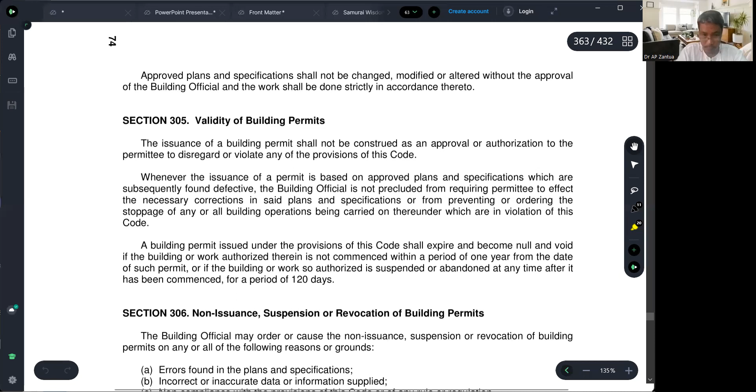So next, we already discussed it yesterday, but we have an appeal within 15 days from the date of receipt of advice of non-issuance, suspension or revocation of permit. So like that example, revocation of permit, you can still appeal. You are given 15 days to do your appeal. And then who will decide on your appeal? You will appeal to the Secretary of DPWH and the Secretary will decide. The decision of the Secretary shall be final, subject only to review of the President of the Philippines.

Take note how powerful is the DPWH Secretary. That is how powerful is the DPWH Secretary. It is only subject to review of the President of the Philippines.

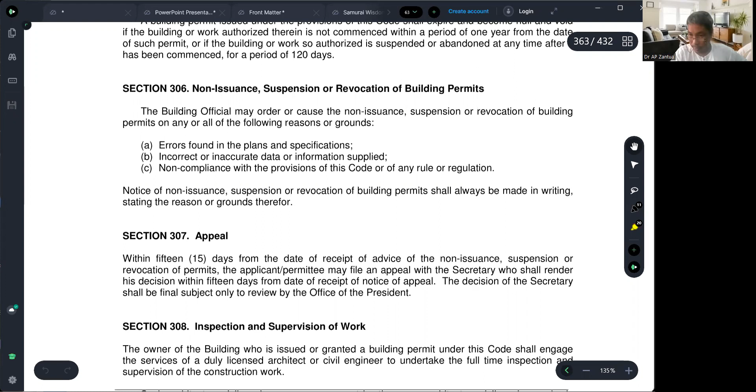Okay, so inspection and supervision of work. We need inspectors. In fact, we already talked about that yesterday, that there are two sets of officials: those who will approve and those who will inspect. And sometimes, most of the time in our country, the one who will approve is the one who will inspect. So that might not be a good practice because there might be somewhat bias. Bias and abuse, susceptible to bias and abuse of those powerful and authorized persons. But that is what's happening in our country.

So the owner of the building issued or granted a building permit under this code shall engage the services of a duly licensed architect or civil engineer. It is specific. Only civil engineer and licensed architect to undertake the full-time inspection and supervision of construction work. So electrical engineer, mechanical engineer is not allowed because it is only a duly licensed architect or civil engineer who will inspect and supervise. That's why those doing this without following this rule or provision are violating this code. Such architect or civil engineer may or may not be the same architect or civil engineer who is responsible for the design of the building.

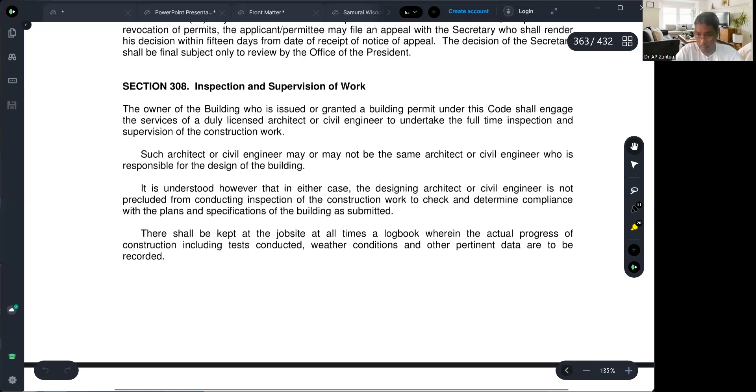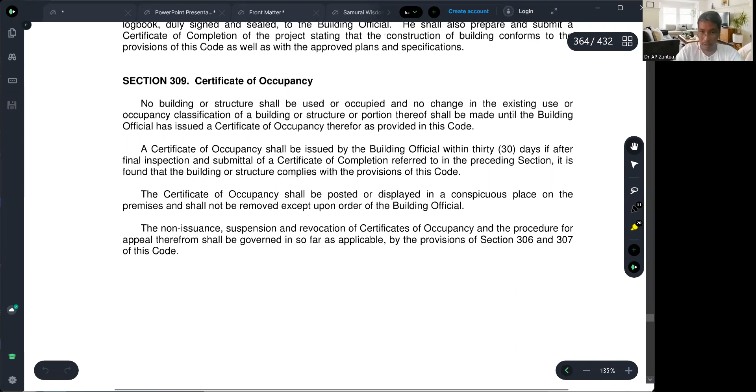Then after construction, a certificate of occupancy must be applied. So the owner should apply this with the help of an architect or civil engineer, for the issuance of the certificate of occupancy.

Non-issuance, suspension, revocation of certificate of occupancy, and the procedure for appeal shall be governed, insofar as applicable, by the same provisions as application for building permit and building occupancy, including the appeal and non-issuance procedure.

Chapter 4, types of construction. So we have different types of construction. There are 5 types of construction according to the building code.

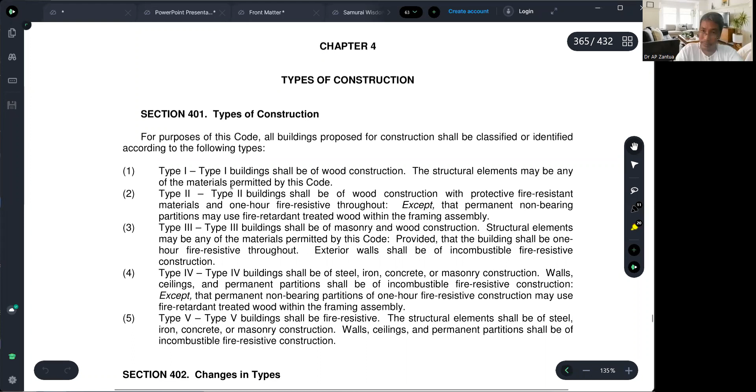Type 1 building shall be of wood construction, while Type 5 building shall be fire resistant. Wood is the type of material that could easily be burned or catch fire, while Type 5 materials are fire resistant. So imagine Type 1 and Type 5 - in between there's a mixture, a level from the easiest to be burned down to the hardest to be burned down.

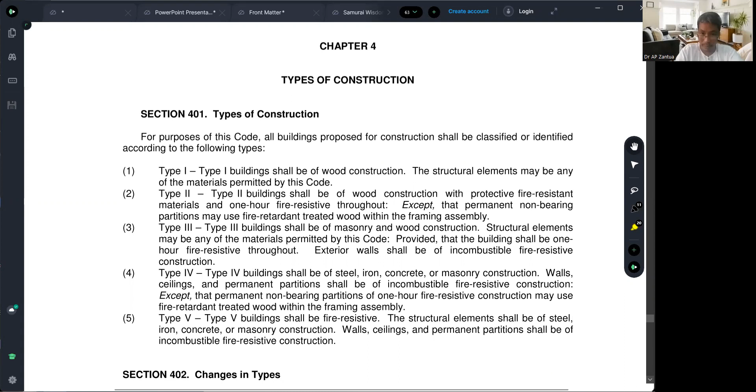That is according to the types of construction. So Type 5 must be those buildings with structural elements made of concrete and masonry, because concrete and masonry are the hardest to be burned down, along with special materials.

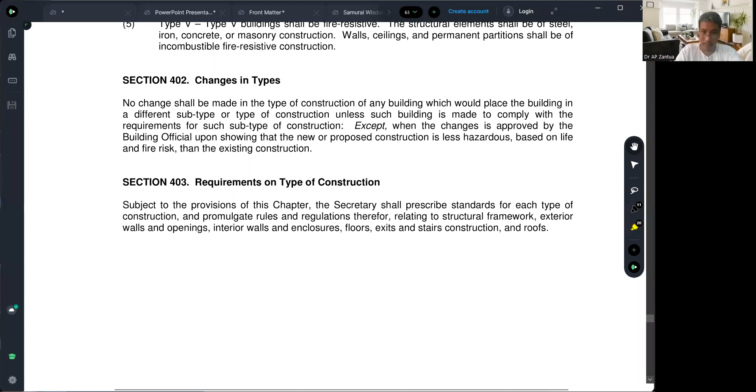There are definitions of fire zones in our country. Fire zones are areas within which only certain types of buildings are permitted to be constructed based on their use or occupancy, type of construction, and resistance to fire. A building located in more than one fire zone, if located partly in one fire zone and partly in another, shall be considered to be in the more highly restricted fire zone.

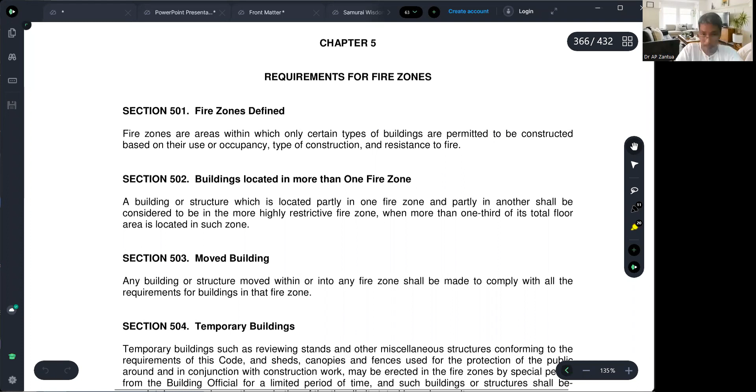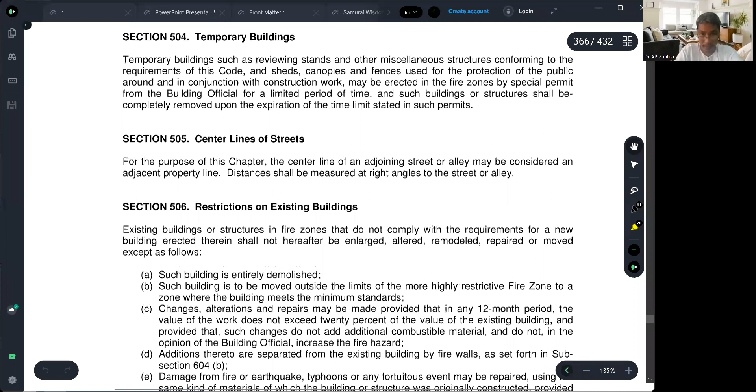Let's look at the different types of fire zones - there are levels of fire zones. This is with respect to fire, requirements for fire zones, Chapter 5.

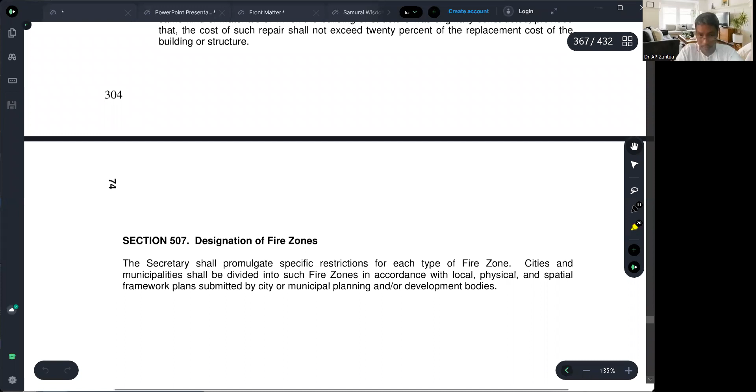Designation of fire zones: the Secretary, meaning the DPWH, shall promulgate specific restrictions for each type of fire zone. Cities and municipalities shall be divided into such fire zones in accordance with local, physical, and spatial framework plans submitted by city, municipal, planning, and/or development bodies. So that is dependent on the local government.

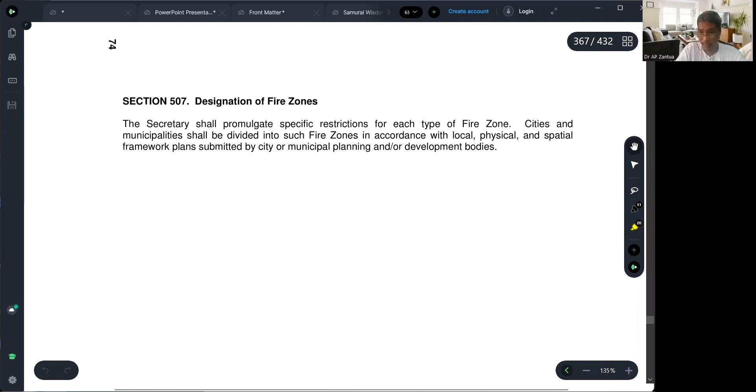Chapter 6, fire resistive requirements in construction. Requirements include fire resistive rating, material rating, fire rating of the material by testing, accredited types of testing methods. Fire resistive time period rating - what do you mean by that? 1 hour fire rating, 2 hours fire rating, 3 hours fire rating, 4 hours fire rating.

What do you mean by hours fire rating? That means, for example, if you have 2 hours fire rating, that material will be able to withstand 2 hours of fire. That is what we call a 2-hour fire rated material.

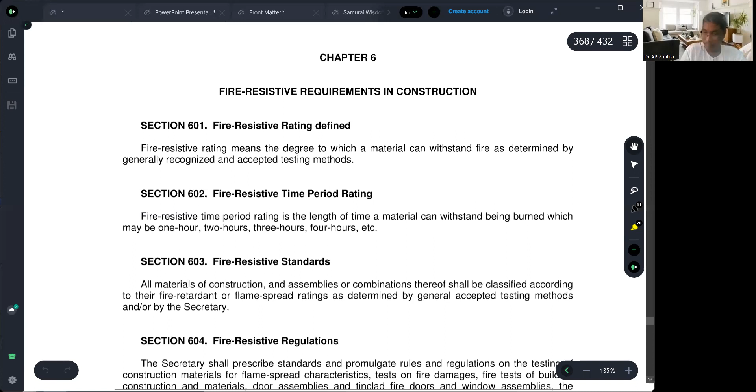Fire resistive standard or material construction assemblies combinations shall be classified according to their fire retardant or flame spread rating as determined by general standards. But actually in our country we have a new law approved and became a law.

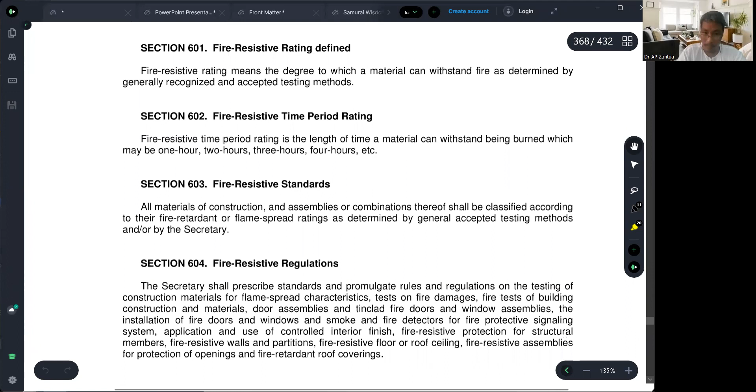So that's why we can jump over that chapter 6, because Chapter 5 and 6 are now overridden by the new Fire Code of the Philippines, year 2008, RA 9514.

Chapter 7, classification and use of building, type of occupancy: Group A, Group B, Group C, Group D. Group A is residential. Group B is residential, hotels and apartments. What is the difference between A and B? Group A shall be dwellings.

Dwellings - you are going to occupy that building 24 hours for a long period of time. How about hotels? You are going to occupy that for a desired short period of time, maybe the longest being 1 year, or 1 week, 1 day. That is a temporary staying place, a hotel - that is not your address. Residential is your permanent dwelling.

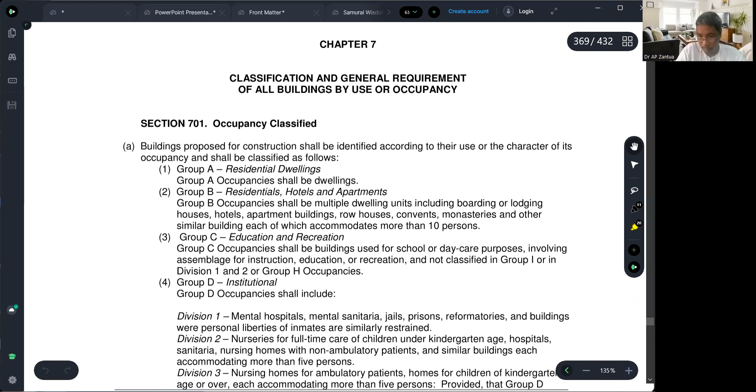Group D, institutional occupancy shall include several types of institutional occupancies. What are those? Hospitals, nurseries, nursing homes.

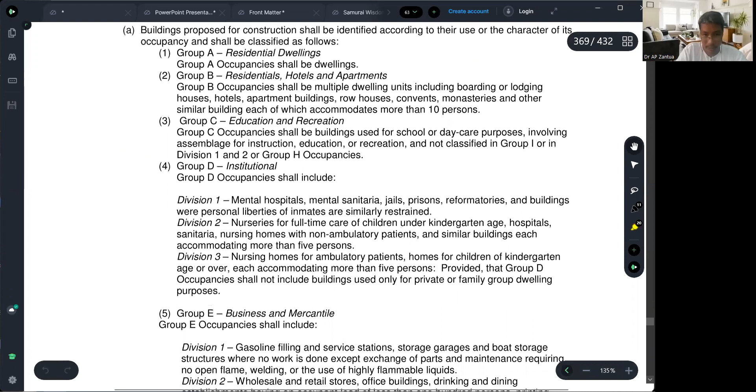Group E, business and mercantile - there are several types of businesses, three types. Group F, industrial.

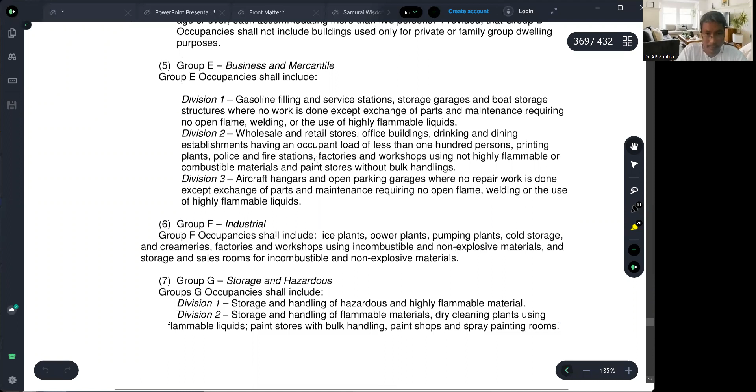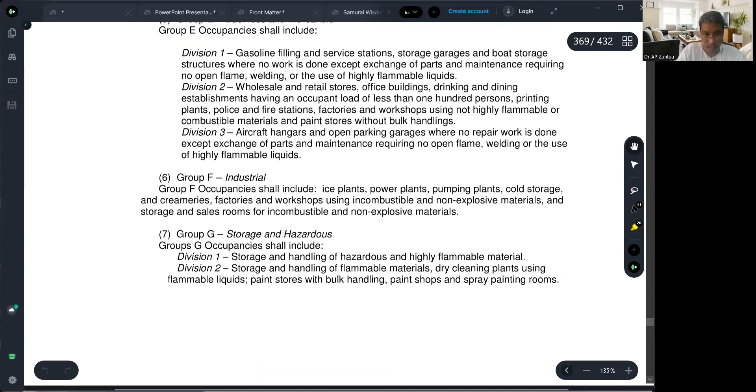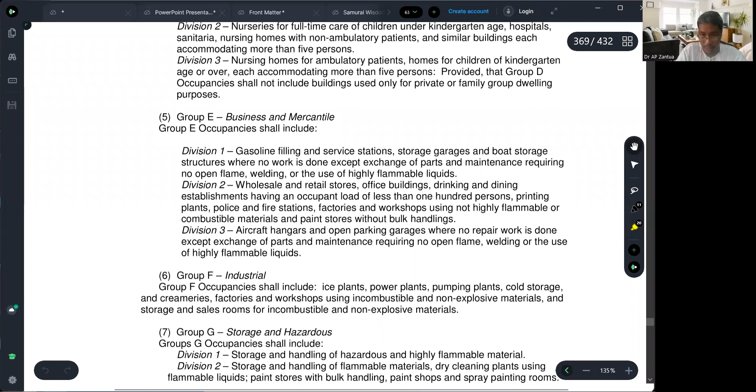Group G, storage and hazardous occupancy. There are 5 types of hazardous and storage facilities. Group H is assembly, other than Group I.

Group I is assembly with occupant load of 1,000 or more. So Group H is less than 1,000. Any assembly building without a stage and having an occupant load of 300 or more is less than 300 without a stage.

What do you mean by stage? That is the portion designed where performance is done, like singing, dancing, and so on. So stadia, reviewing stands, amusement parks, structures not included within Group I or in Division 1, 2, 3 of this group - accessory - are Group J.

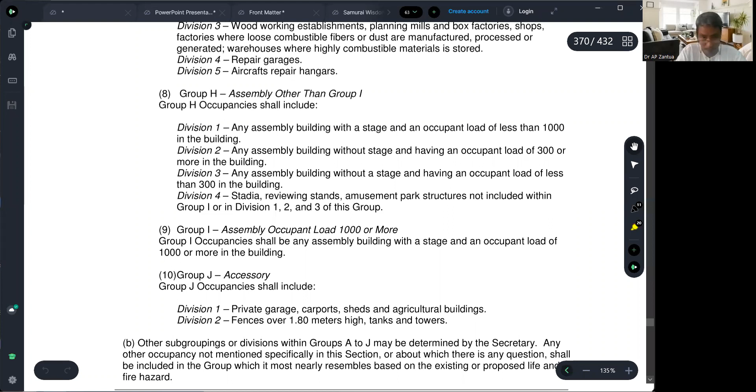Is that all? Other groupings, special groupings may be determined by the secretary. So those are the standard groupings according to this code.

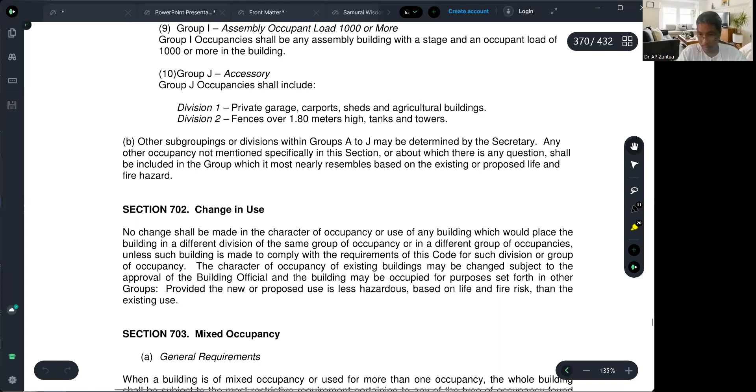So standard occupancy type - meaning what is the function of your building? For what purpose do you want your building to be built? For stage presentation, for residential, for hotel, for business, for mercantile.

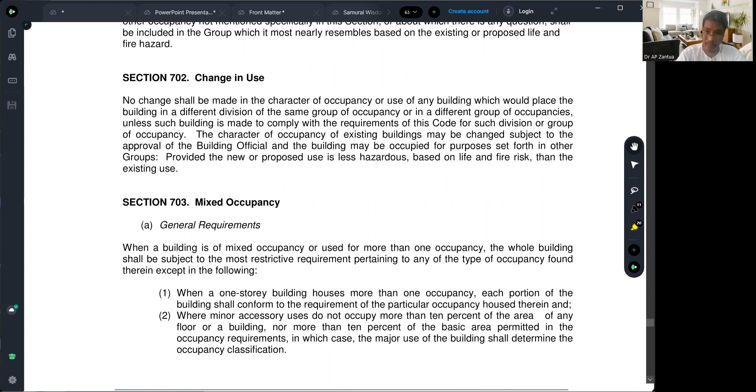Business and mercantile application are different. There is a discrepancy between mercantile and business use. If you change in use, you have to inform them and ask for permission. Mixed occupancy.

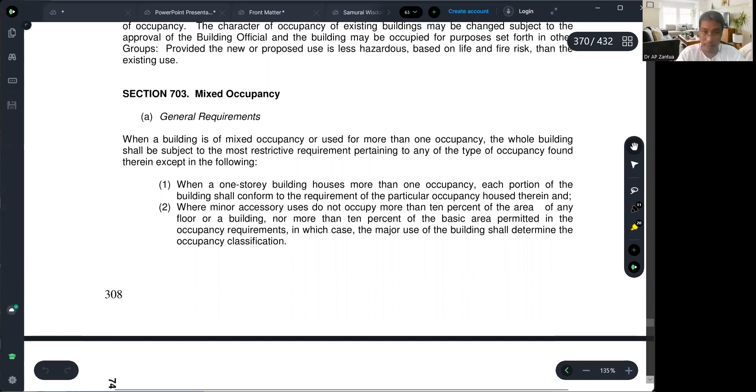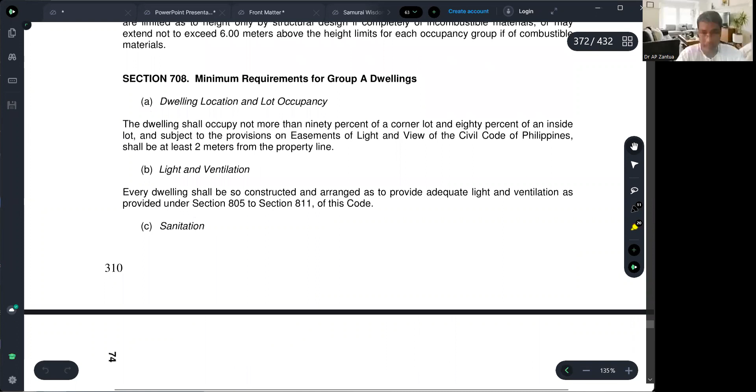So that is for chapter 7. Then chapter 8, light and ventilation. These are very important for public health - requirements for light and ventilation, measurement of site occupancy.

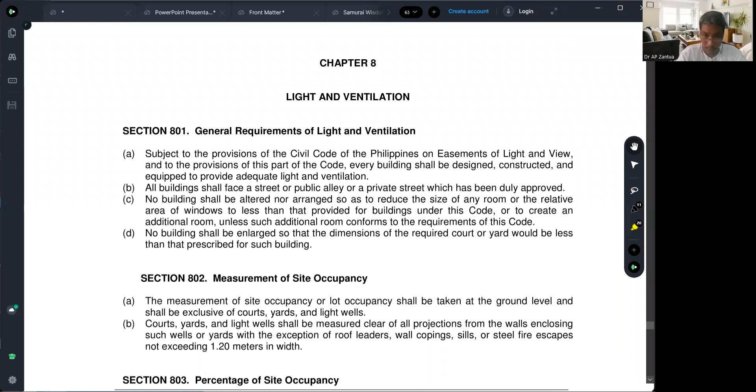So, fire escape not exceeding 1.2 meters. There must not be over 1.2 meters projection, for example, of fire escape.

Percentage of site occupancy, size and dimensions of courts, ceiling height. Habitable rooms minimum - take note of the design. How much is the ceiling height minimum?

Habitable rooms provided with artificial ventilation shall have ceiling height not less than 2.4 meters minimum. That is with artificial ventilation. Without artificial ventilation, the minimum shall be 2.7.

And for the second floor, 2.4. Succeeding stories shall have an unobstructed typical headroom clearance of not less than 2.1. So from third floor and above, 2.1. Summary: ground floor 2.7, second floor 2.4, third floor and above 2.1 meters above the finished floor.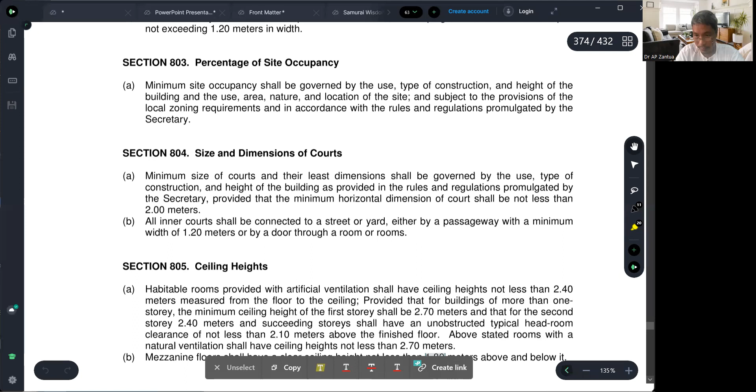So take note of that - size and dimension of room. Minimum habitable room is 6 square meters. Less than 6 square meters is a violation. So minimum dimension is 2 meters, meaning if 6 square meters, that is 2 by 3.

That is the smallest room allowed by this code in our country. Kitchen - the smallest kitchen allowed is 3 square meters, with the least dimension being 1.5. So the smallest kitchen is 1.5 by 2, and 1.5 times 2 is 3 square meters. That is the smallest kitchen.

What about the CR? What is the smallest CR? 1.2 square meters, and the smallest dimension is 0.9. So 1.2 divided by 0.9 - let's divide using our calculator. Take note of this, memorize this: 1.3. So the smallest CR is 0.9 by 1.3, which equals 1.2 square meters.

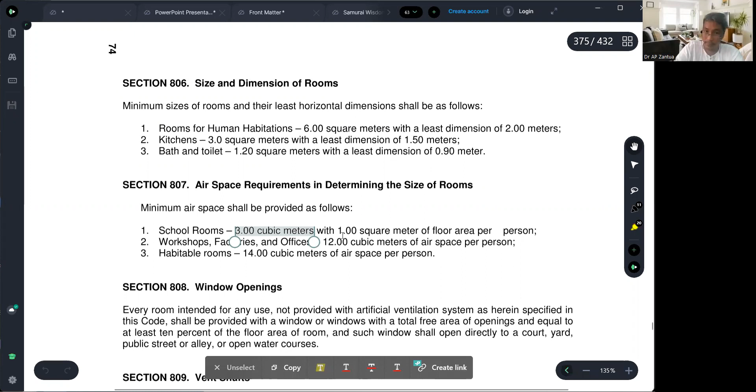Estimating the number of crowd volume. So this is the crowd volume, with basis: 1 square meter, 1 person. And they are computing that in 1 square meter, they allowed 2 persons in 1 square meter in a crowded area.

Because those are in open spaces, they are not inside the room, that's why they are allowed. So inside the school, it's 1 person per 1 square meter.

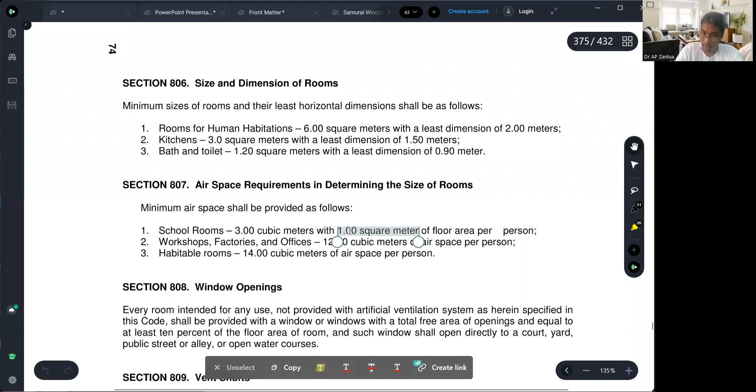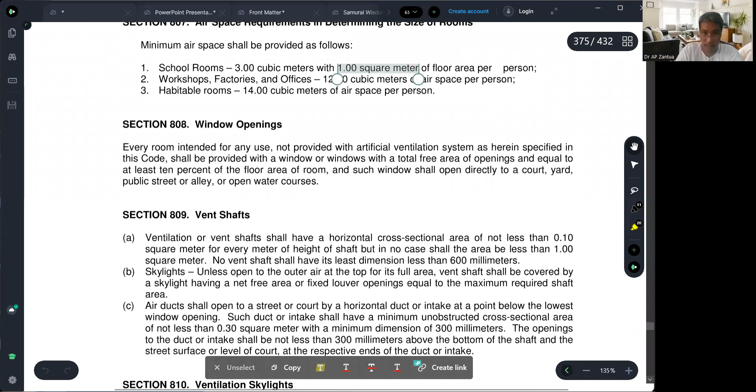Window openings, we have provision for that, vent shafts. We have provision for air duct, ductings, right? Air duct shall open to a street or court by horizontal duct or intake below. So this is very important to us because now this is mechanical. We are studying engineering utilities mechanical: ventilation, air ducts, skylights.

So air duct shall have an intake at a point below the lowest opening. Such duct or intake shall have a minimum unobstructed cross-sectional area of not less than 0.3 square meter, with a minimum dimension of 300 millimeters.

So 1 meter by 300 millimeters, above the bottom of the shaft in the street surface or level of court, at the respective ends of the duct or intake. What else? Skylight.

Unless open to outer air at the top, its full area vent shall be covered by a skylight having a net-free area or fixed louver opening equal to the maximum required shaft area. There is a requirement for vent shaft. The space provided for elevator is what we call shaft, elevator shaft.

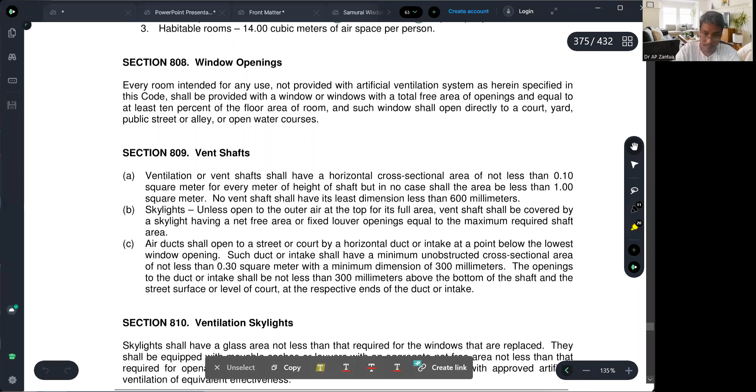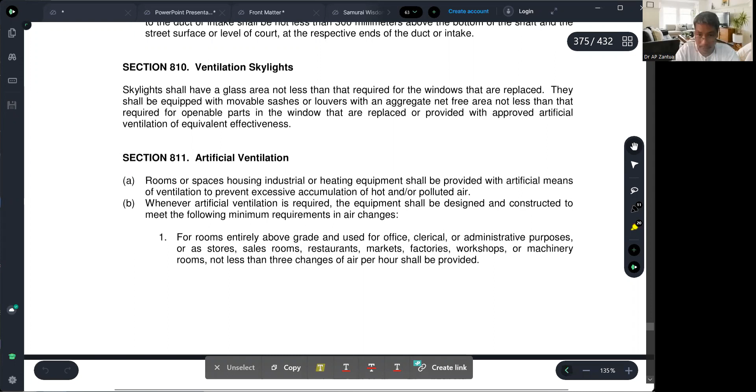So let's jump over that. Artificial ventilation means using equipment. If you cannot follow the provision for natural ventilation, you have to use artificial ventilation, meaning you need equipment like fans and air conditioning. Those are artificial ventilation.

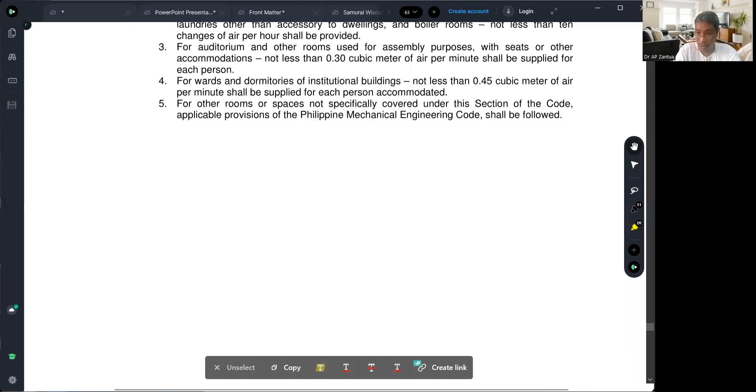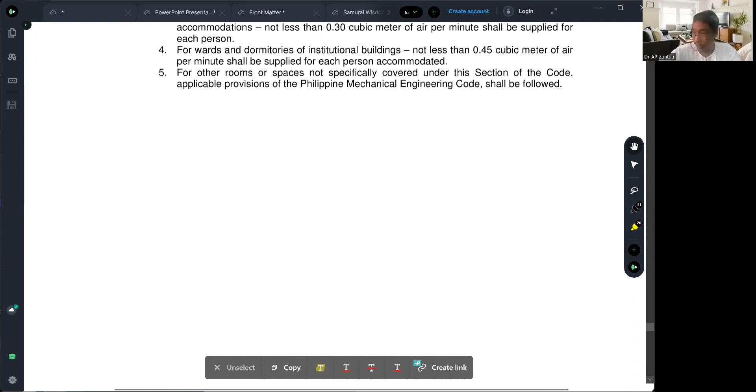An air conditioning system is also a mechanical device, not only making habitable rooms cooler, but also changing the air, taking in fresh air from outside and discharging used air from inside. Used air means we've already polluted the air with carbon dioxide, since as human beings we exhale mostly carbon dioxide. We inhale oxygen, we exhale carbon dioxide, so that must be replenished. The amount of carbon dioxide must be discharged and oxygen must be replenished from outside. That is another function of air conditioning.

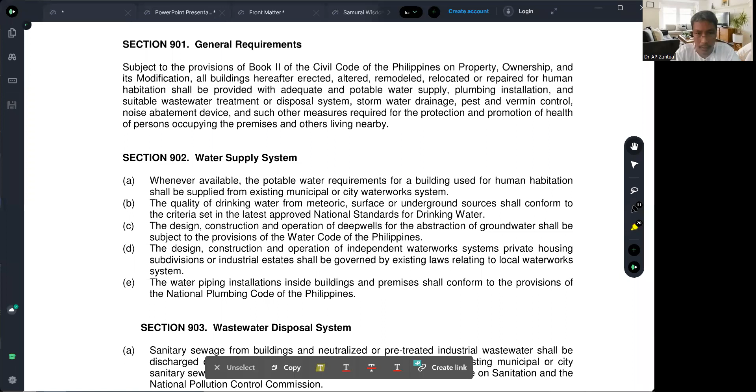So the next chapter is Chapter 9. What is this about? What is the title? Water - sanitation, including water and wastewater, and water requirements. This applies to both the sanitary engineer and master plumber. It is included in our engineering utilities too.

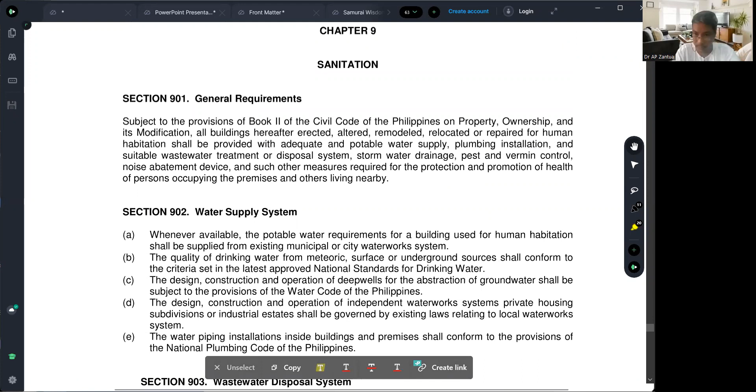We will take a look at this later. Storm drainage system is included, meaning the amount of water that falls over your roof must be controlled going down to your structure. So there must be a presence of gutters and a proper draining system.

This is unknown to many: pest and vermin control is subject to the National Building Code. What do you mean by vermin? Rats - pest and vermin means rats and cockroaches. Controlling those things is actually under the National Building Code, under sanitation, proper sanitation.

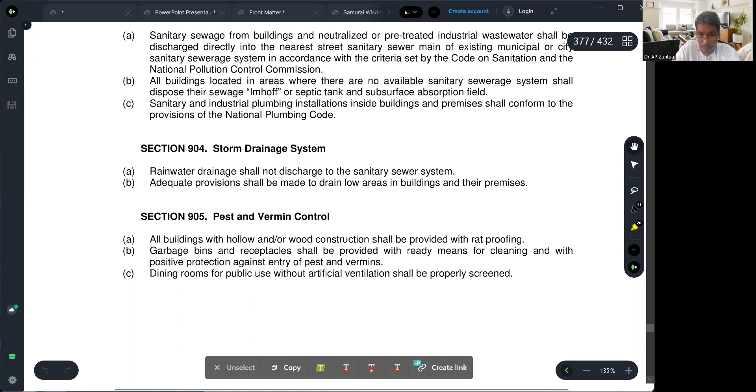That's why we have a Sanitation Code of the Philippines, including noise pollution control. If you're a neighbor, usually in Metro Manila there are so many complaints, but the public doesn't know that there is a law that prohibits that. You can only make noise without disturbing another person. If you do produce noise that disturbs another person, that is pollution - noise pollution. The fact that neighbors are being disturbed means they are polluted by your noise, and there is a law for this.

But can you go to the police and report that? You could say to the policeman, please arrest those neighbors because they are violating the noise pollution control law, Section 906 of PD 1096. You can say that to the police, but the police will not react.

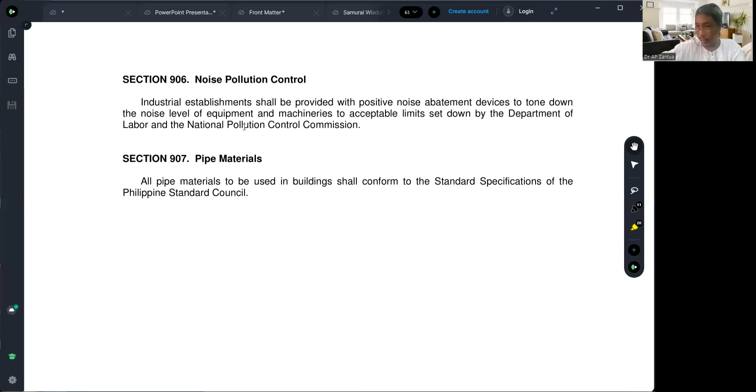Once you get that clearance to file a complaint, you can now go directly to the police using that paper. This means the sanitary inspector or sanitary engineer of that municipality is now commanding the police to assist you in your problem. Sometimes the sanitary inspector themselves will accompany you and ask for one or two police assistants, and they will go to your neighbor.